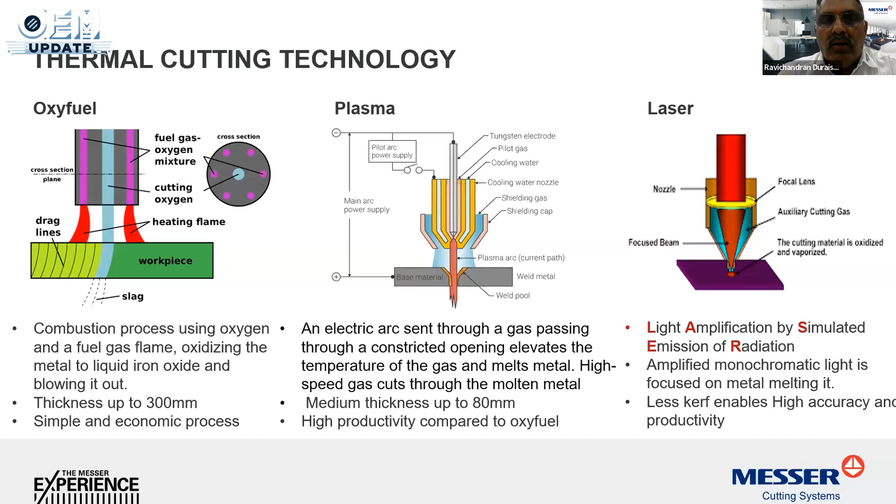So at Messer we specialize in oxyfuel, plasma, and laser cutting machines. I don't want to go into the depth of the process, where we can go up to 300 mm maximum cutting with oxyfuel, and maximum cutting of 160 mm, generally 80 mm in a production flow, and similarly for plasma and laser.

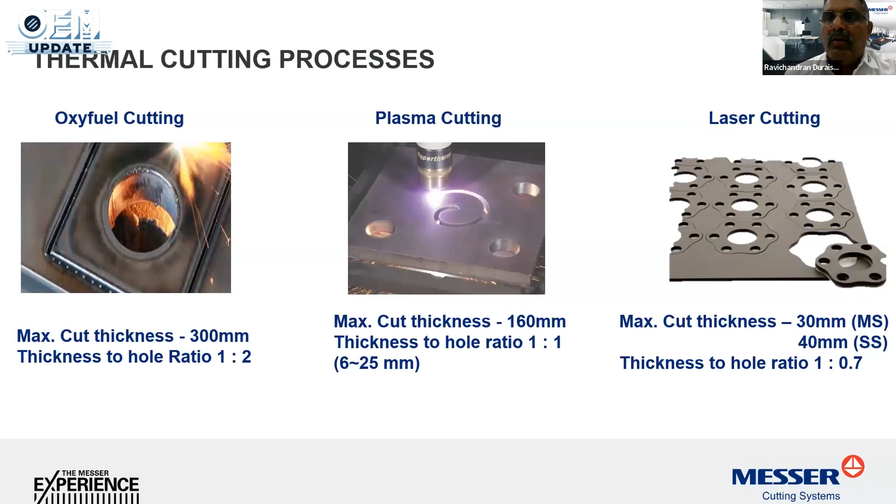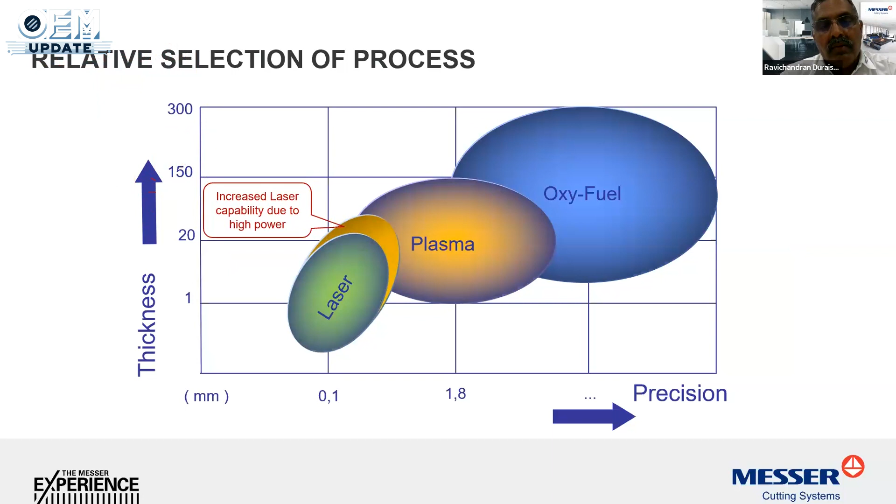Now to be very specific on the machine front, we have now got very optimized machines which produce high productivity, with the increased power of the laser and the increased power of plasma. The need for automation is felt because of that, because we have high productivity machines, and all the industrial sector is moving towards lean manufacturing.

They want very minimum idle time to be experienced in the production process. Another thing is the production batches have shrunk down, where people want to shift from one process to another, one product to another. So you have to have switching over between materials which are very specific to different products. All these things give an emphasis to use automation in the process and also in the production flow.

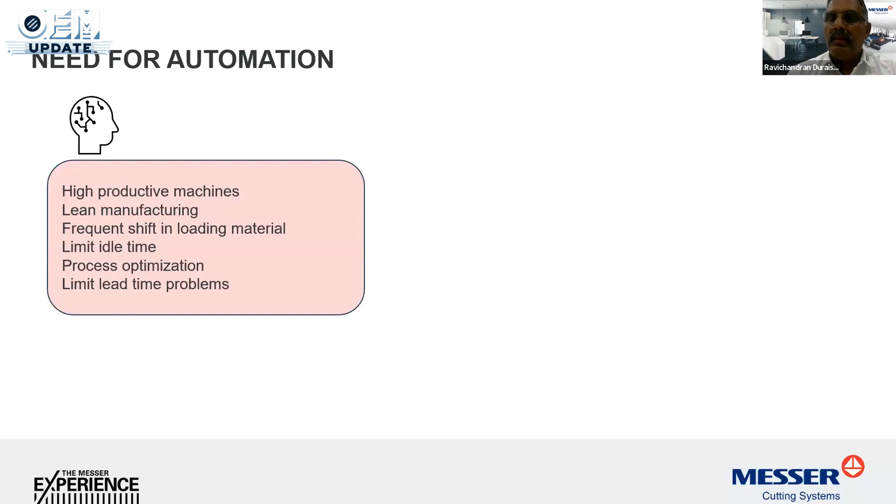So you can have automation on two fronts. One on the materials being handled — either you're storing it, or transferring it from storage into the machine, or feeding material onto the equipment. And after the process is done, sorting out the processed parts. Like you have a plate, then different types of parts being cut, and how you are going to take it out and bin them. If that is automated, that's a great thing.

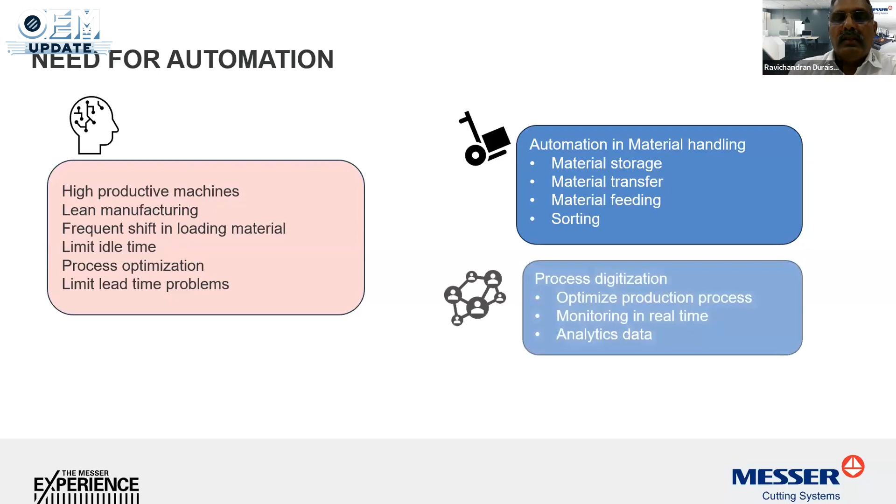That's another thing — digitizing the process, wherein you optimize your production process and can always monitor, and in real time get information about the process. When you get that in a digital format, it's easy to analyze the data and know where the bottleneck is, and where you have to improve your process. All these things can be analyzed beforehand, before you start the actual process.

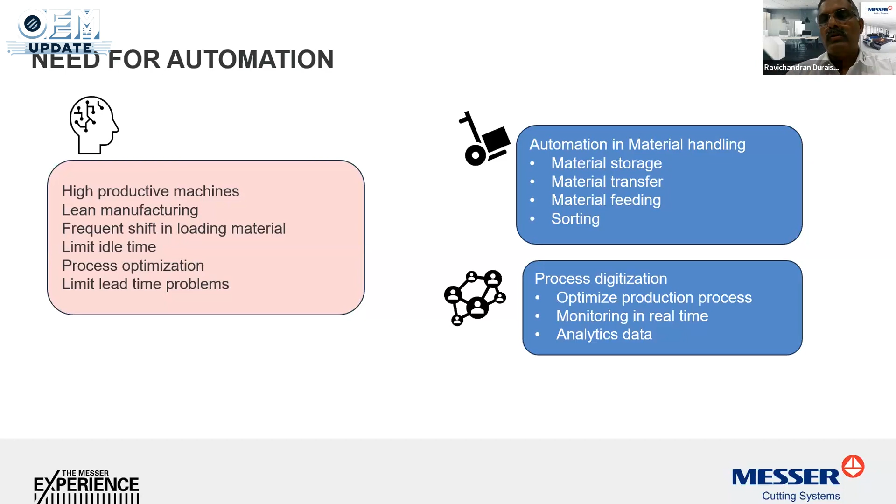So I'm going to talk about automation in material handling and process digitization, which are the most specific automation areas in the metal industry. The benefits of automation are increased productivity, lowered operating cost, improved worker safety, better use of manpower and equipment, and it also helps in easily shifting from one product to the other.

And improved planning, because when you automate, your automation system takes care of the non-value added activities, whereas the operator is left to work on higher ability jobs. So these are a few benefits which you get from an automated workflow.

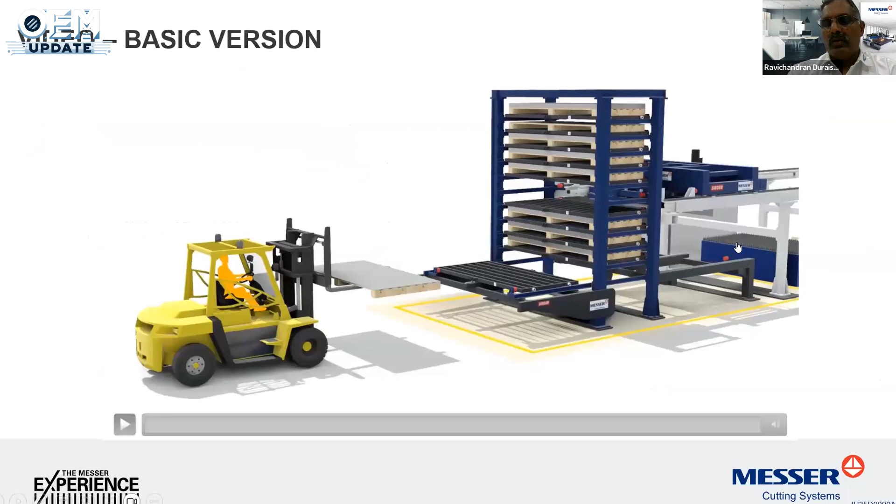This is a video showing the material being stored, and the process material being unloaded and loaded onto the machine. I'll skip this because time is short. Earlier, the conventional way of loading material is directly from the forklift or overhead crane to the machine, and after that it goes out to the storage area.

But with automation, you can store it on a vertical storage, which gives you reduction in space, and your inventory is well controlled. It reduces your losses in inventory.

There are different methods of putting the plates onto the machine. You can handle a bundle of sheets, and a picker can pick it up and load sheet by sheet, where you don't need a lot of manpower.

When you reduce dependency on manpower, your productivity increases and the machine doesn't starve for material. So this type of material handling system actually increases your productivity and also gives lower dependency on manpower.

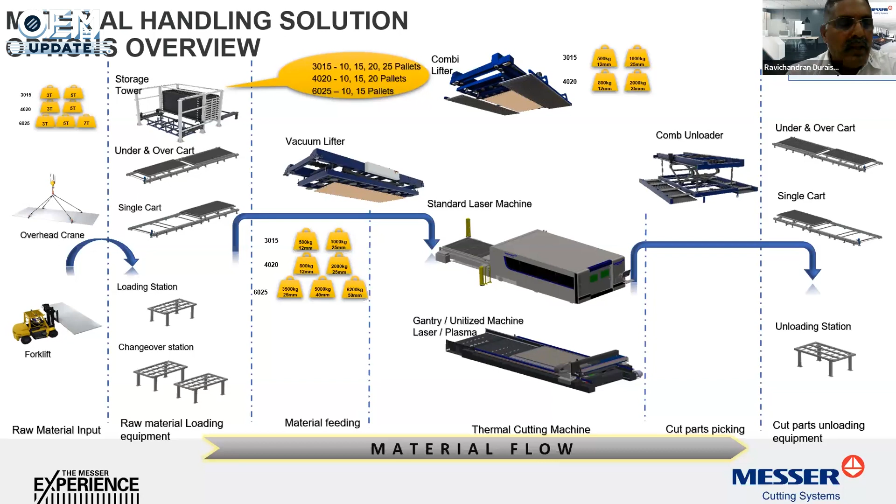So you can have various combinations, like a loader putting out the plate, because in metal forming it comes as flat plates and it can be stored.

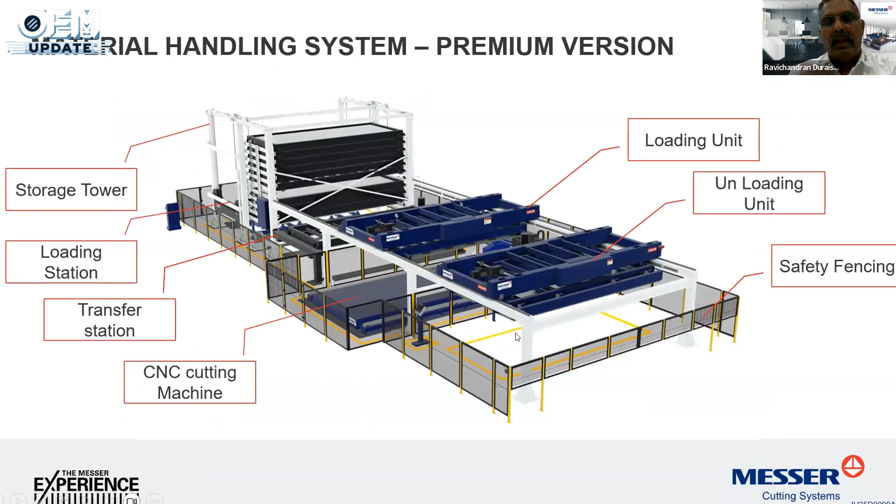This is a typical example where you can see a loader with a vacuum pad or a magnetic actuator picking up the material from the prescribed location and loading it onto the machine, then unloading it onto the picker area. You can have different models, including a combined loading and unloading system.

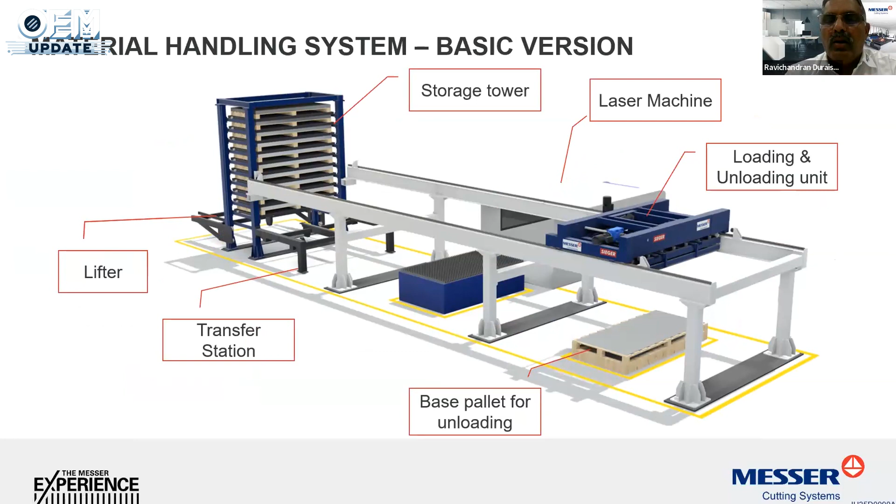There's also a storage tower, and multiple storage towers either vertically, or in some cases where only specific plates need to be handled, you can have specific locations horizontally on the floor, but well managed with the inventory system, so you're always aware of your stock at any given point in time.

There's another automation step after you cut the parts. The best approach is to pick out the parts and store them in bins, or take them to the next location. So we can have pickers that pick the cut parts from the machine and put them into bins.

Loading the material involves a lot of manpower, and unloading the parts also involves a lot of manpower. So when the nesting is done, the machine knows exactly where the parts are and where each type of part is available in the nesting plan.

So it automatically picks up the required part and puts it in the designated bins. The time taken to retrieve and make the machine ready for the next operation is reduced, so machine utilization goes up, and productivity also increases, by at least around 30% in our customer machines. This covers material storage, handling, feeding, and sorting.

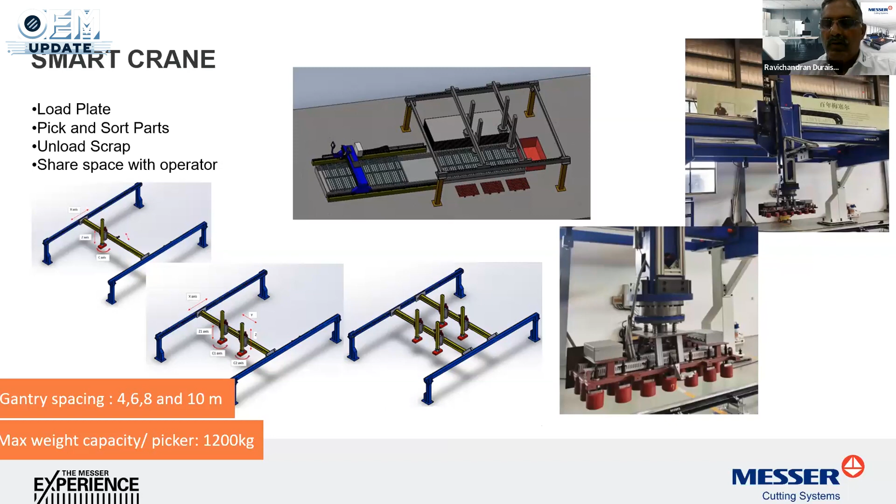This comes under material movement, and next is process automation. Automation is going digital - going digital means you automate your ERP system along with your production planning and production process.

A lot of people have an ERP system fully disconnected from their production machines. So their planning, nesting software, or CAM software are not integrated with their ERP systems, which requires manual intervention.

That's not really a bottleneck, it's more of a request - it's high time people stop the manual intervention of shifting data from the ERP system to the CAM software.

So if that is possible, the workflow is very smooth. And the second thing is what is the workload on the machine, how it is being scheduled, and based on the output requirement, which parts should be scheduled prior and which parts should be scheduled at a later stage, and on what machines. So all this, if it is automatically done, it takes quite a load off the planning

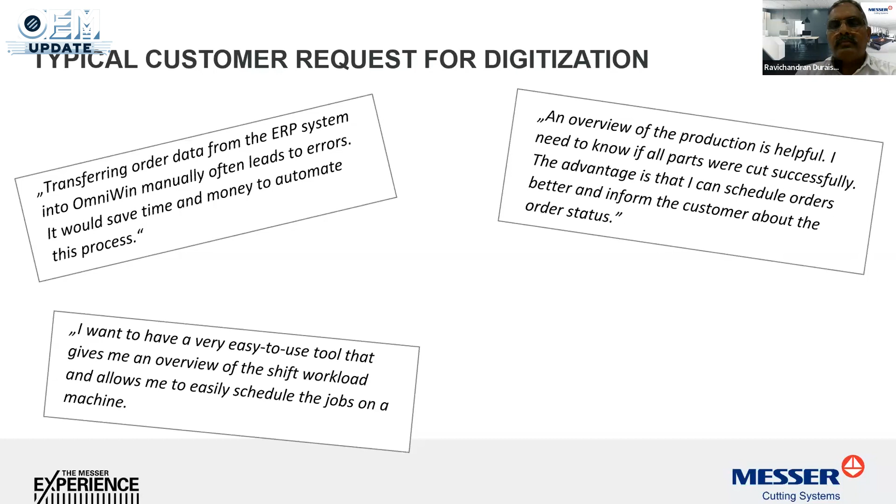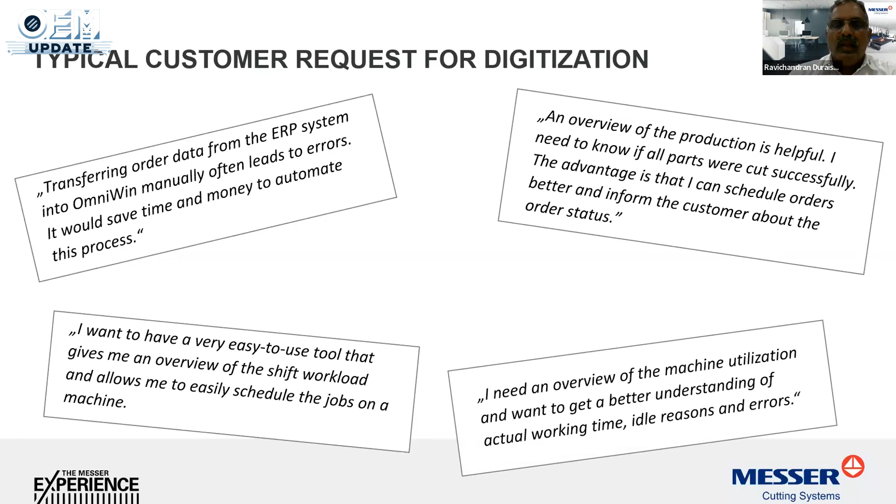process. And then on the material utilization, machine utilization, people would like to know how their machine is utilized, whether it is underutilized or they get the best out of their machine. So these informations are the most needed for the industry. So if you digitize, it gives you more efficient operations in order management and work preparation and in machine operation and in planning, and also it gives relevant

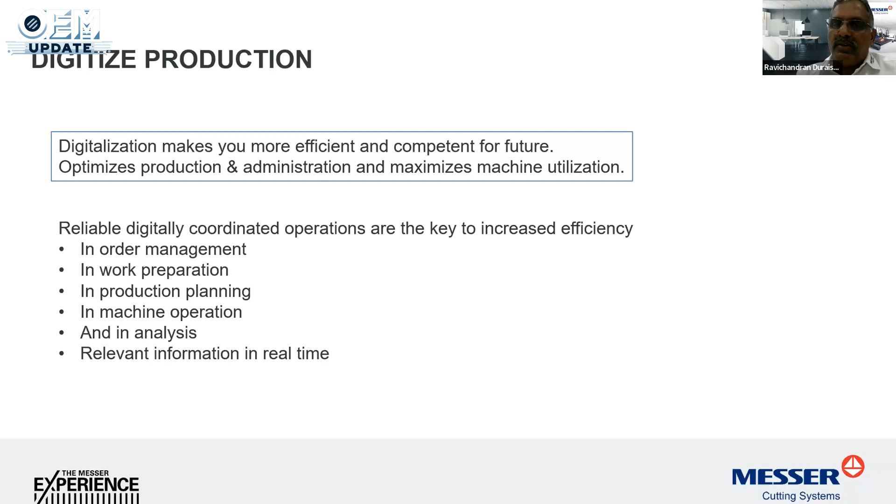information in real time. So for the future, it is always better to have a digitization of process, which optimizes the production process and the administration also, and gives you maximum utilization of the machine. So it's like a typical shop floor scenario where you have an ERP system which creates the demand, and then that demand is converted to the process planning and schedule on the machines which are used to

process the plates. So if you have a scheduler automatically taking up your demand from the ERP system, that gives the automation process. And then from the machine, once the operation is done, the information of what is being processed, how much is being accepted, and what is being rejected. If all these data are not manually added onto your ERP system, it is directly taken from the machine. If that's a process, then that can be easily fit into your ERP system without any manual intervention, which can reduce your time and also reduce the errors which are done manually.

So here in Messer, we have tools which can give you seamless support by connecting ERP to the CAM software, which we call the OmniFab. And then we have a scheduler which can take up scheduling from the software. And then we have a PDC, that is production data collection, which takes up the actual process data and feeds it back to the ERP system. So the whole process can be digitized.

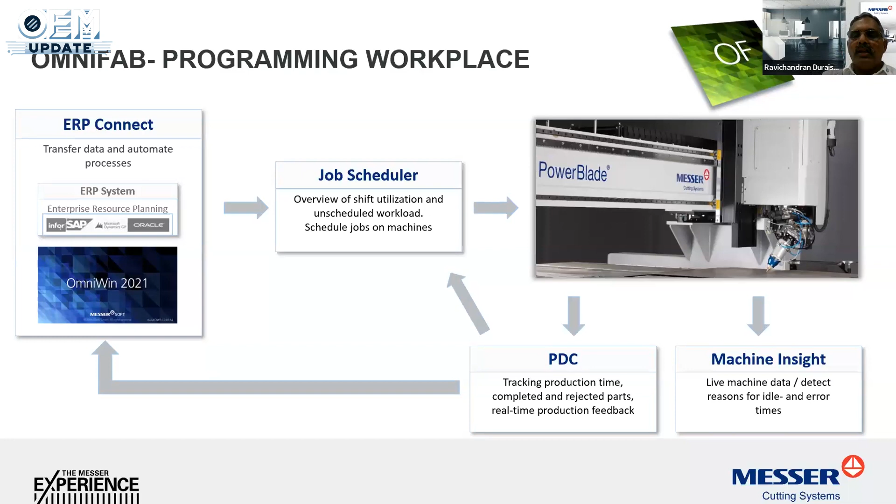And we also have the Machine Insight, which gives live, in the sense real-time, information on machine utilization, and if there is an idle time, why the idle time is there, and you can have it as a report and analyze, and so you can fine-tune your process. So in Messer we have all tools which can totally digitize your process and which can help you identify the bottlenecks much earlier than when you start doing the process.

So we have the ERP Connect, and from OmniFab, we can straight away take up quotes of the cut parts, how much it is, and the quotation information can be given automatically. And you have the job management with the scheduler, and then the Machine Insight, which gives real-time information of the machine. So it automates the process, and shows bottlenecks much in advance and gives real-time feedback, on-time delivery, and this type of automation will always provide transparency over the whole process and effective utilization of machine and manpower.

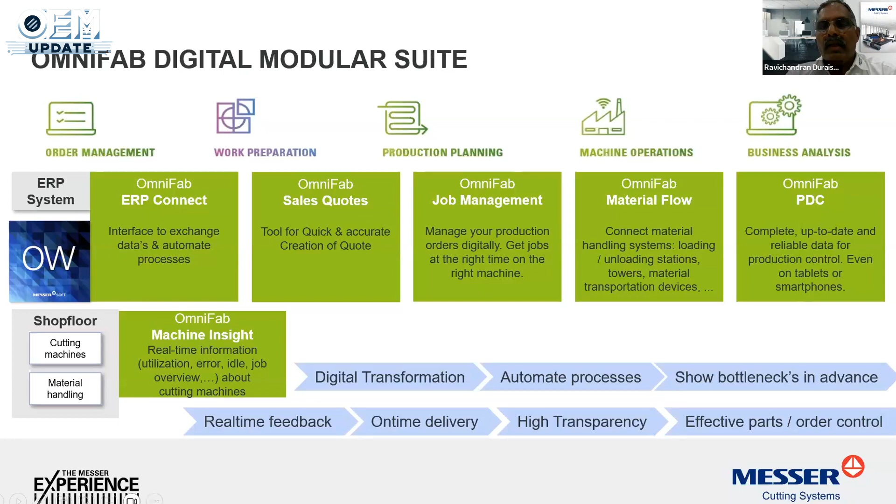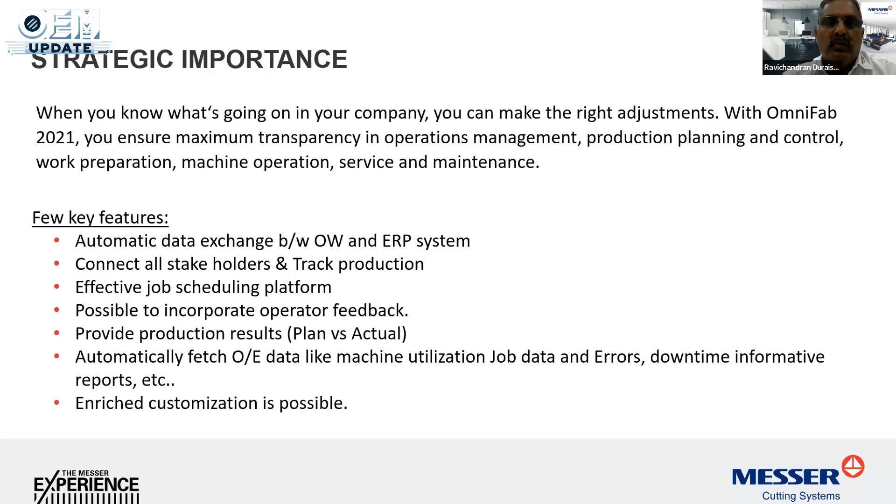So it's like automatic data exchange between OmniWin and the ERP system, and connect all the stakeholders, and effective job scheduling, and provide production results, plan versus actual. All the analysis can be done using the OmniFab tools. So the onus is on automation to increase productivity by at least 30% and lower operating costs. It depends on industry to industry, and quality increases, an improved work environment, and increased worker safety. These are the benefits of automation in the metal forming industry.

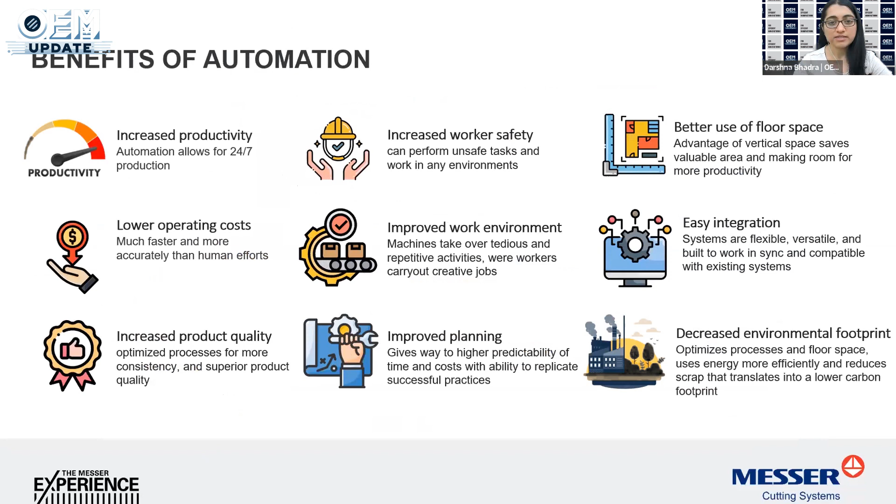Thank you, Mr. Ravichandran, for taking on this topic and sharing your views on automation in metal forming.